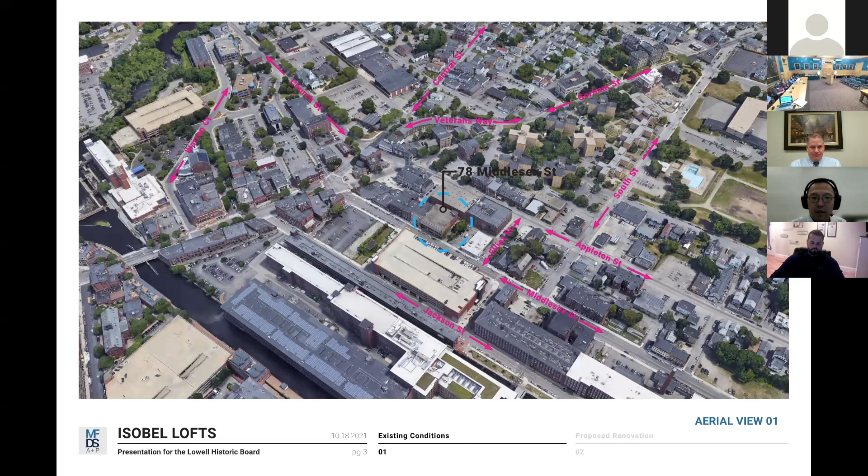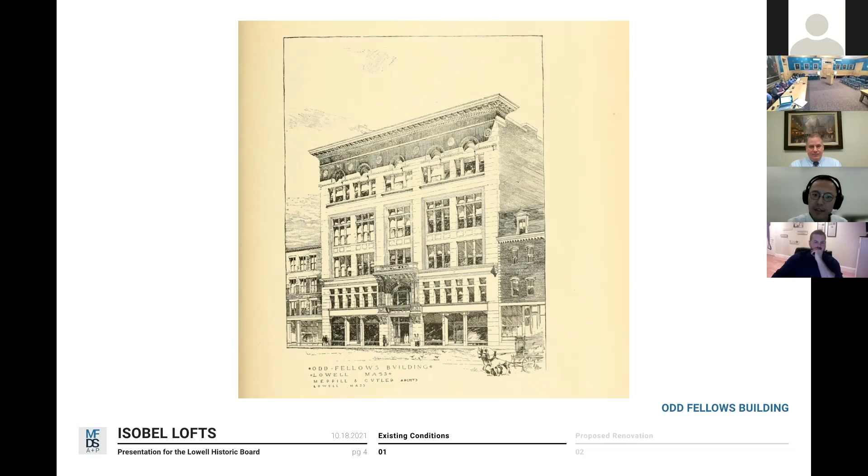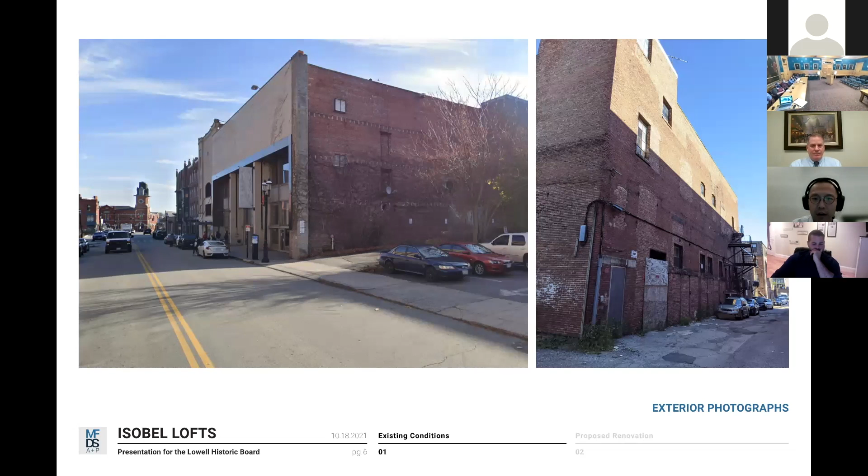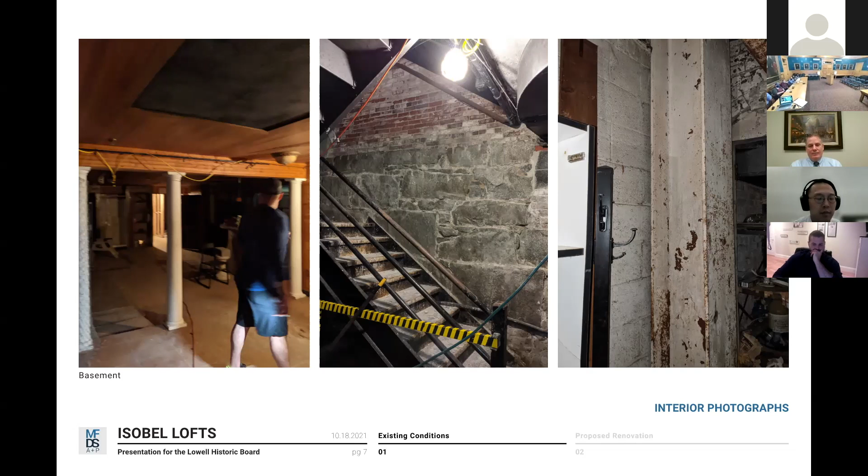You can see that there's a good mixture of existing party wall brick on the sides and the rear, as well as a new masonry exterior wall of the 3-story commercial building. The existing conditions on the inside, we believe, are the original foundations to the Oddfellows building, as well as a mixture of brick, load-bearing brick, steel, and wood infill. So it's currently just a hodgepodge of structural systems in the building.

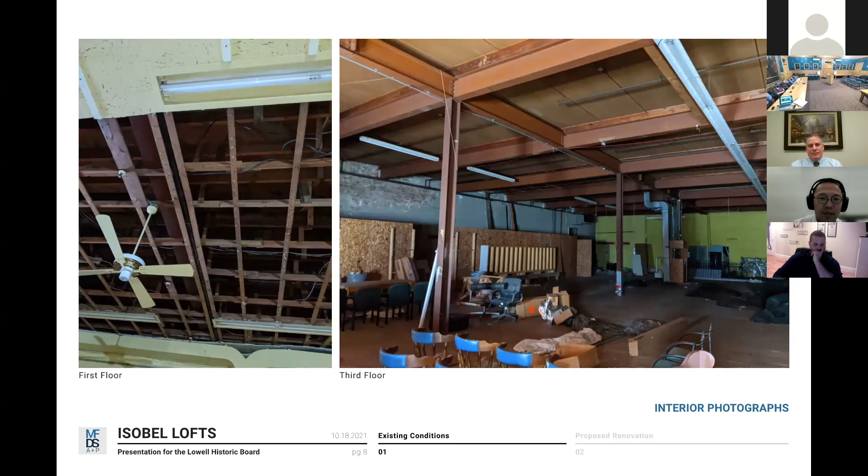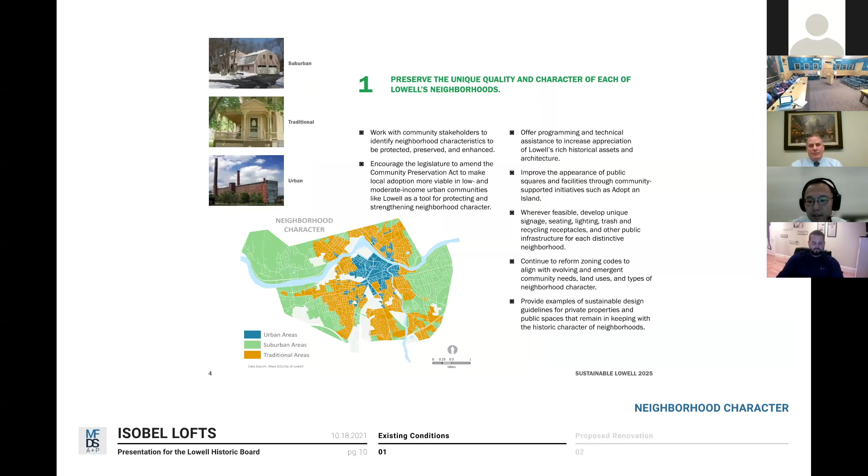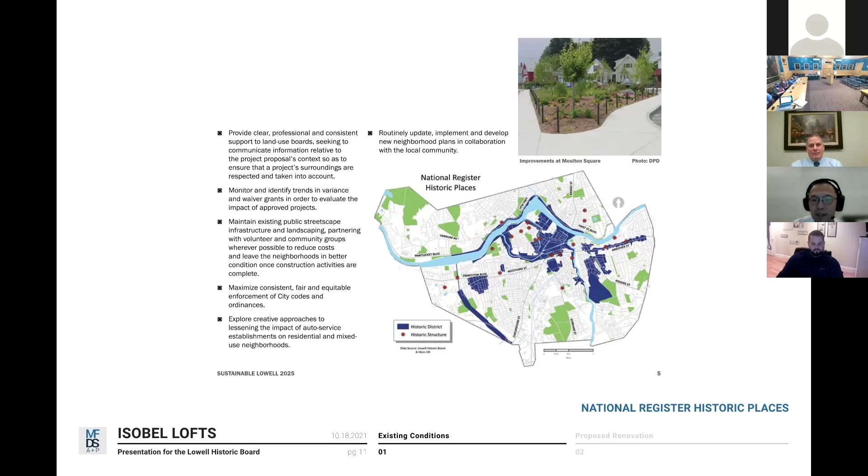Just some context—we are in the urban area in the downtown zoning area for Lowell. And as we've mentioned, this is in the historic district, but it's a non-contributing building, given that it was built in the 70s without any regard for the existing building before it.

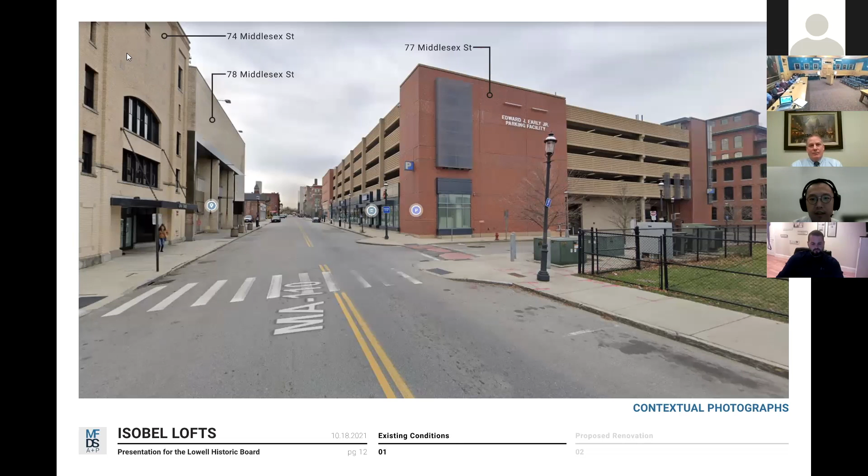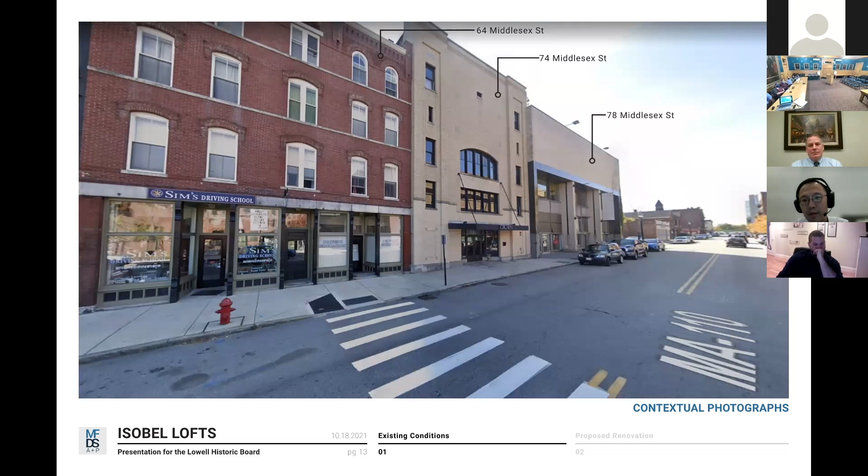Some more context: 78 Middlesex is the tan building in the background on the left, just adjacent to 74 Middlesex, and then the Early garage across the street. This stretch is a bit eclectic. You can see the start of the more historic area just 2 doors down from us, but as you go down the street, we have the vacant lot that we also own, as well as the single-story commercial building next to that.

With the proposed renovation, we are proposing to keep the existing 3-story structure and completely gut renovate and rehab the structure to a new facade.

We are proposing to landscape the current paved lot into an open, landscaped space for the tenants, with some utility areas in the back for loading, trash, and transformer areas.

We are also proposing to cut a new open air atrium into the middle of the building. The building is about 90 feet by 90 feet square, quite deep, good for a commercial space, not so great in terms of getting light into the darkest spaces for units and residents. So we've proposed to cut a rectangular hole all the way down to grade to get natural daylighting into the deepest part of the site and the existing building.

It'll provide natural daylighting for the units, as well as a small open space just as you enter the lobby from Middlesex Street, you see here. There is an existing pool that was part of the Club Fitness in the basement, and we are proposing to add a new skylight that would let daylight in from this new atrium down into the basement.

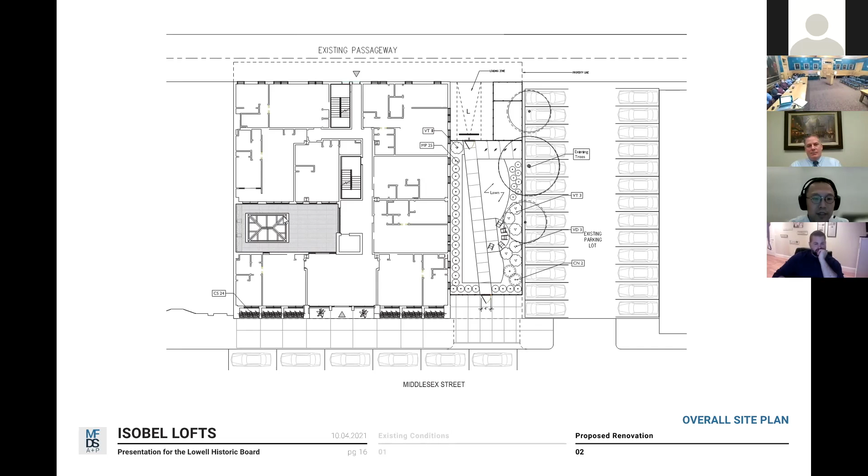This is a sketch of a proposed landscape that has a number of revisions in coordination with DPD and Steve. We originally had the fence setback 10 feet, but in discussion with Steve Stoll and DPD, the recommendation was that the fence be brought back so that it is coplanar and aligning with the front of the existing building, continuing the line of the street wall along the sidewalk of Middlesex Street.

We are proposing to fence the entirety of the landscape with an open metal picket fence. It's a private use for the residents, with a variety of low-lying hedge bushes to line the perimeter.

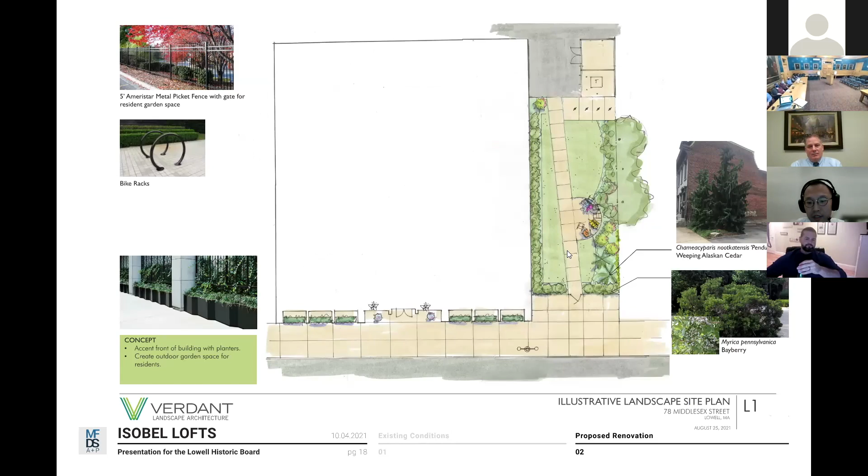We are also proposing in the revised sketch to put a tree in the bottom right corner of this image, but I believe it's the northwest corner of this landscape plan, to provide some shade at the sidewalk.

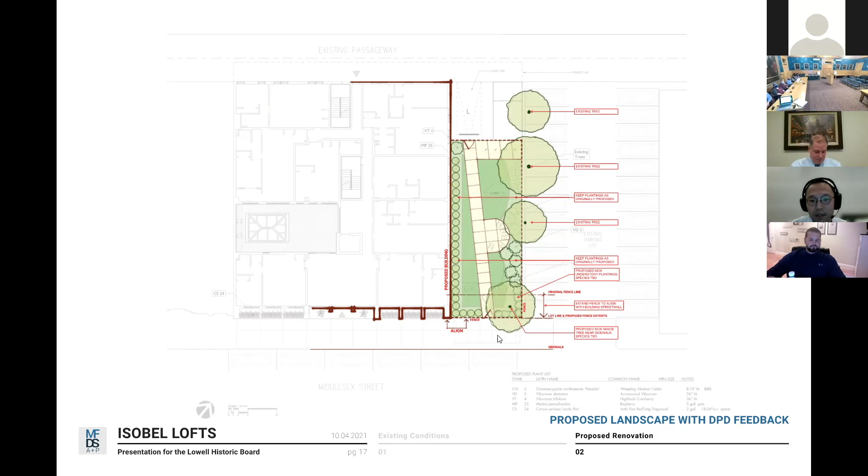To go through the plans quickly: the proposed basement, we are proposing to keep the pool and renovate the existing area to be amenity space with a bathing and lounge area surrounding the pool, a gym fitness area to the north of the page, and all the changing and showering facilities needed.

We're also proposing per-unit tenant storage down in the basement that will accommodate bikes in lieu of a dedicated bike room that not all tenants would use. We're proposing to provide each tenant with a separate space, a large locker, if you will.

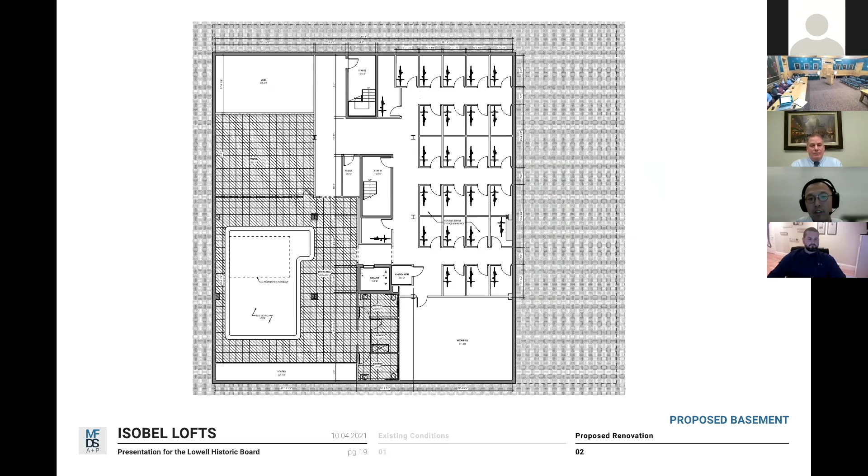Going back to the ground floor, zooming into the plan, we propose that you come into the building through the center into a large lobby that looks straight into the open space and atrium of the new courtyard. On the ground floor we have 8 units lining the perimeter, and the main elevator and stair lobby in the deepest part of the building, centrally located.

On the upper floors, it's more or less the same plan, except the lobby has now been replaced with another unit. Again, you can see the atrium providing a lot of daylight for these units in the deepest part of the building.

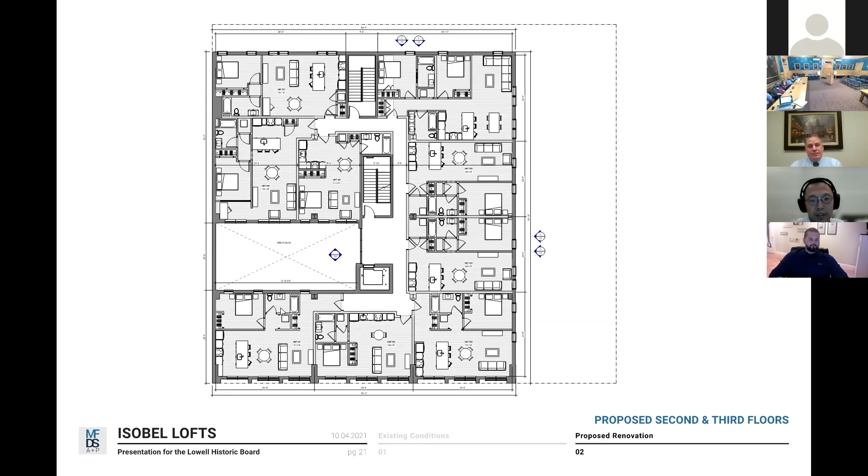On the roof, we do not have specific rooftop mechanical equipment at this point, but based on previous projects of similar size, this is the amount of rooftop mechanical equipment we suspect will be needed. We're proposing again to put it in the middle of the building.

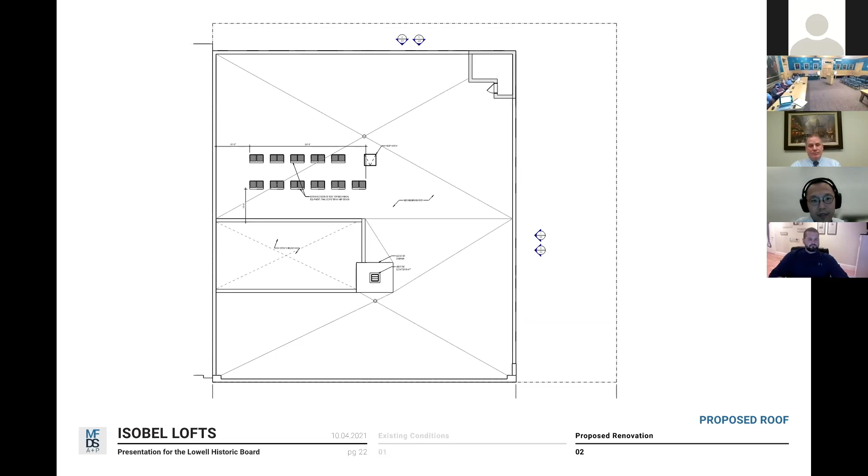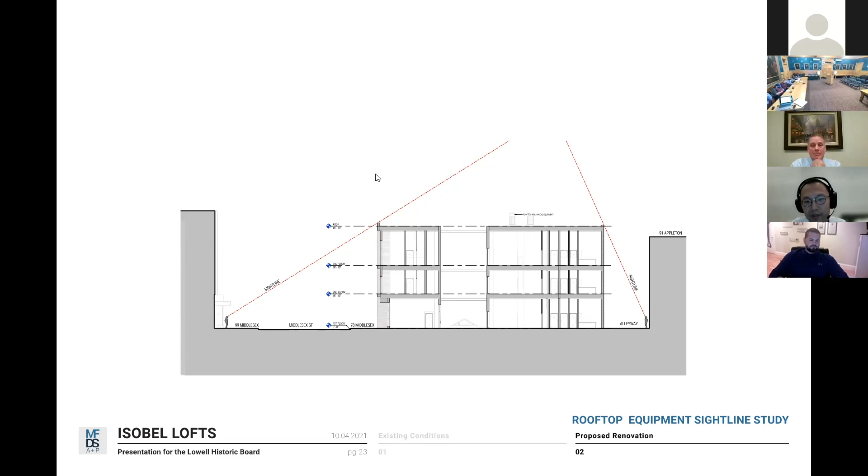On the next page, we did a sightline study. Where I'm circling with my mouse is where the two rows of outdoor condenser units are located, and to the left we have Middlesex Street. Across the street at 99 Middlesex, we have a person with a sightline view of the parapet of the proposed 78 Middlesex, as well as another person standing in the back of the alley looking up at the rear of our building. So from the street, there should be no views of the proposed rooftop mechanical equipment.

So with the existing 3-story structure, there are some strong bones, some lines within the existing structure that we must keep.

It obviously is not the Oddfellows building, and so we are not proposing to build and design a traditional historic building, but we hope that what we propose is a modern, contemporary piece of the fabric that hopefully will fit into the downtown character.

So we are proposing to completely rehab the exterior along the street wall of 78 Middlesex with a strong new brick frame that provides some rhythm and order to the building. Inset from that, we have large format cementitious panels that provide the backdrop, as well as large windows from a company called Amberline, a European thermally broken tilt turn product and system that's very efficient and quite insulating.

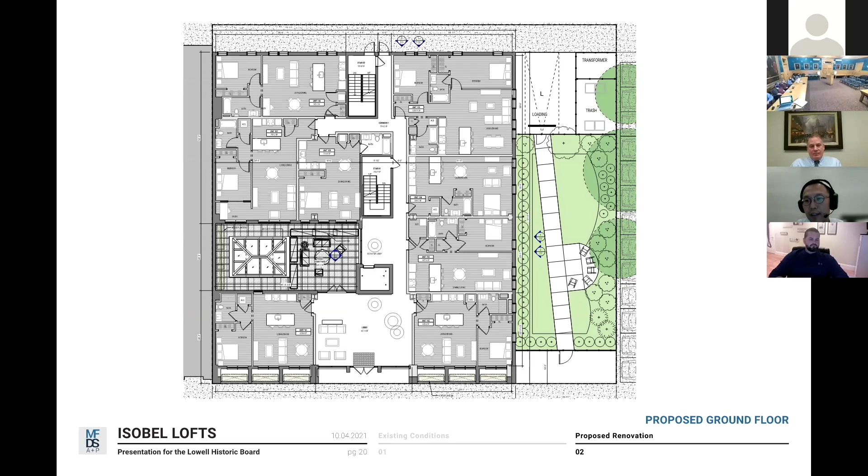On the ground floor, we've actually stepped back the first floor wall 5 feet, and we propose to put the same fencing that we have for the landscape across these deep wells along Middlesex Street. Beyond that, we have a series of fixed planters that will provide some privacy, so that these ground floor units have ample daylight and some screening from the street.

Proposed versus existing, you can see there's some strong bones of especially the outer perimeter walls, but we suspect that these pilasters here are structural as well, and so we are proposing to keep that and continue that rhythm.

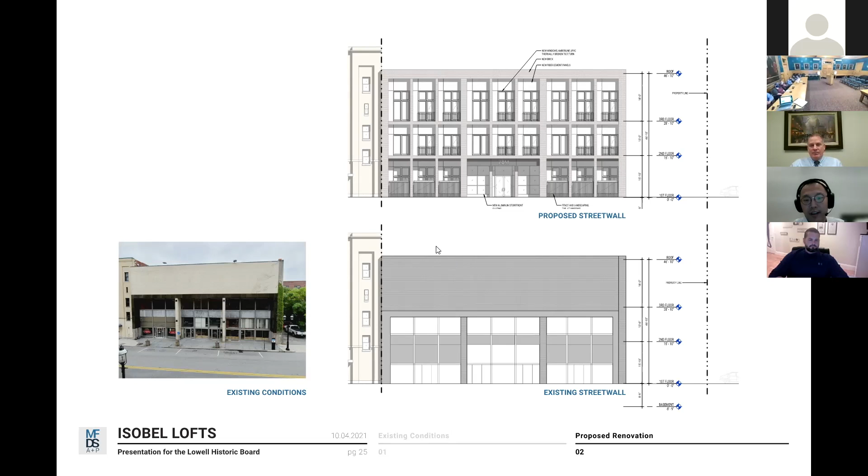This image represents the scope of what we hope to do with the size and the amount of openings for the windows for the units. But of course, once we get going with our team of consultants, with the approval of all the boards, we hope that we will do this study and get the windows right.

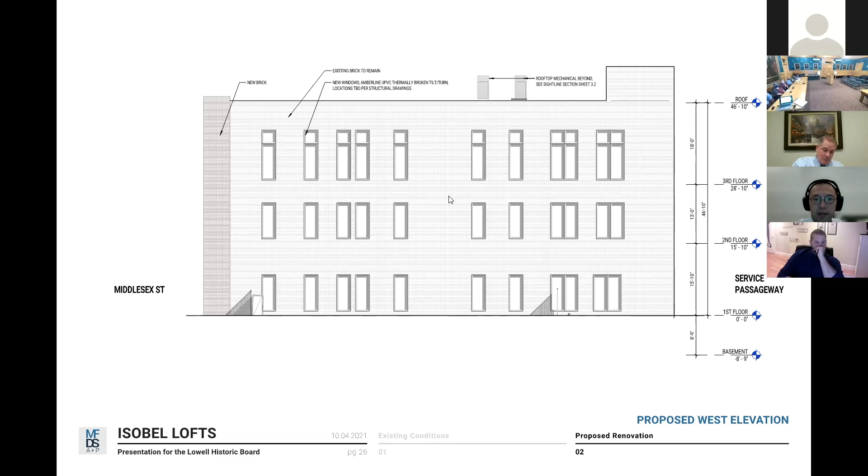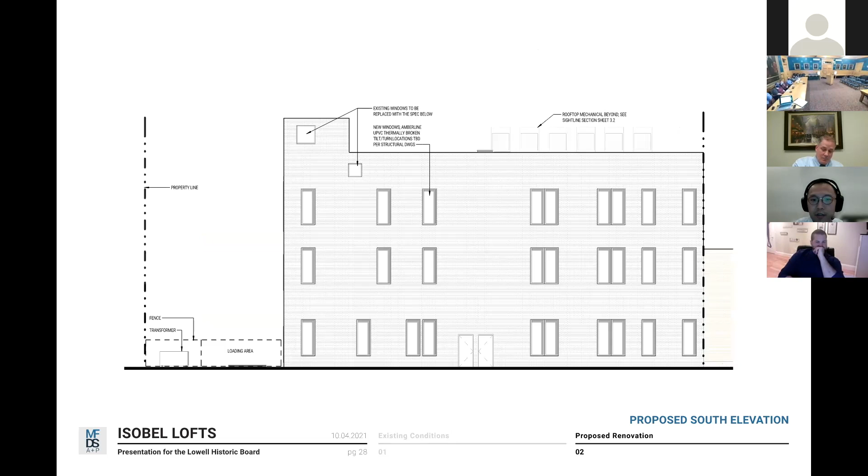We are proposing to keep this existing brick and cut new openings for these new units. Again, existing versus proposed, and you can see in this smaller image on the lower left, the existing party wall brick. In the rear, it's the same condition, existing brick that we are again cutting new openings into, and another snapshot of existing versus proposed with a photo of the alleyway.

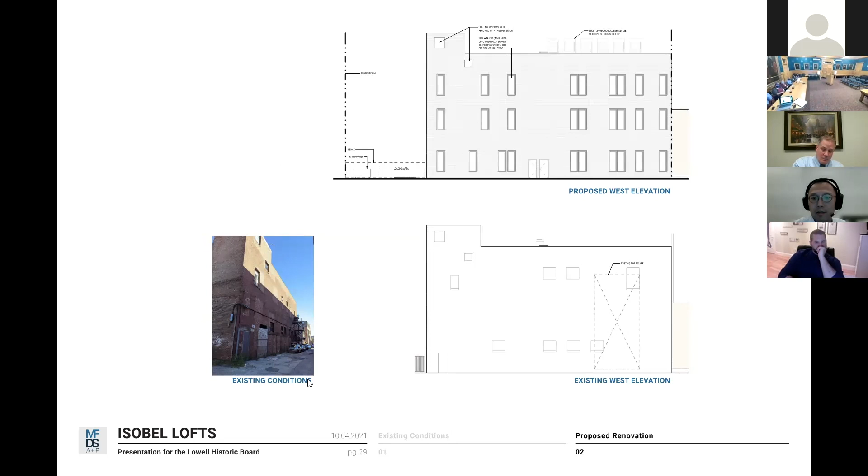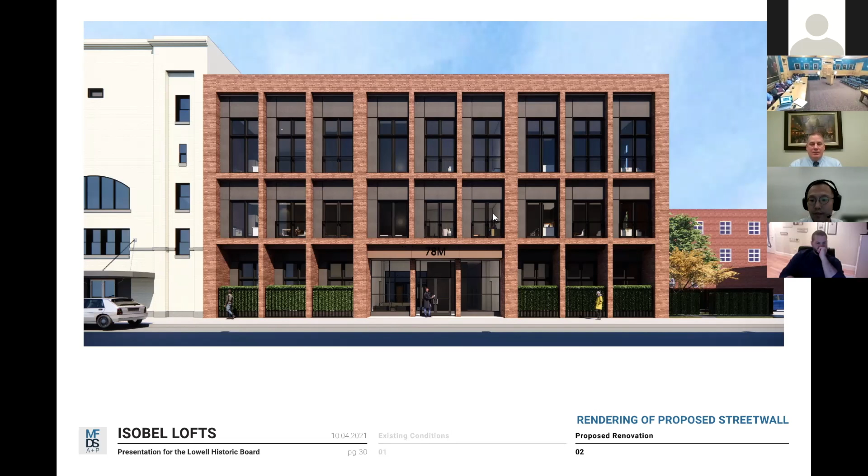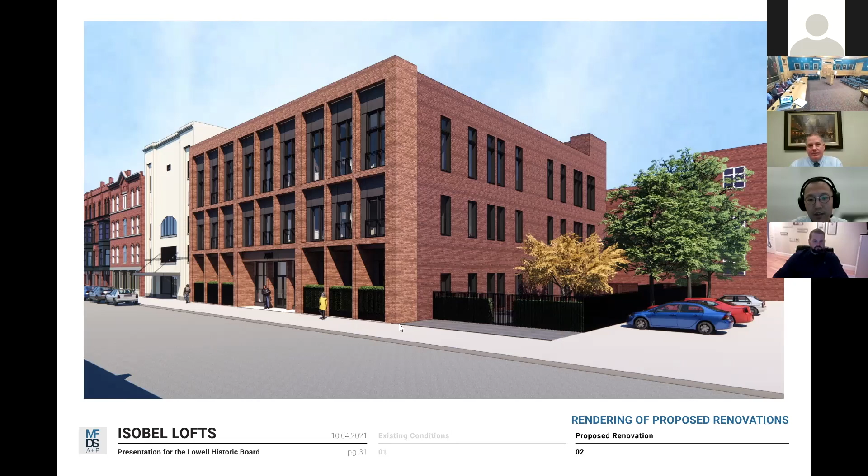Just looking at the corner of the proposed development, this image is outdated. We've since made those corrections to the landscape after we submitted this package, but this fence would be brought up right along the sidewalk, so that there's a continuous line of this picket black metal fence along the street wall. You can see the scope of new openings that we propose along the existing brick wall.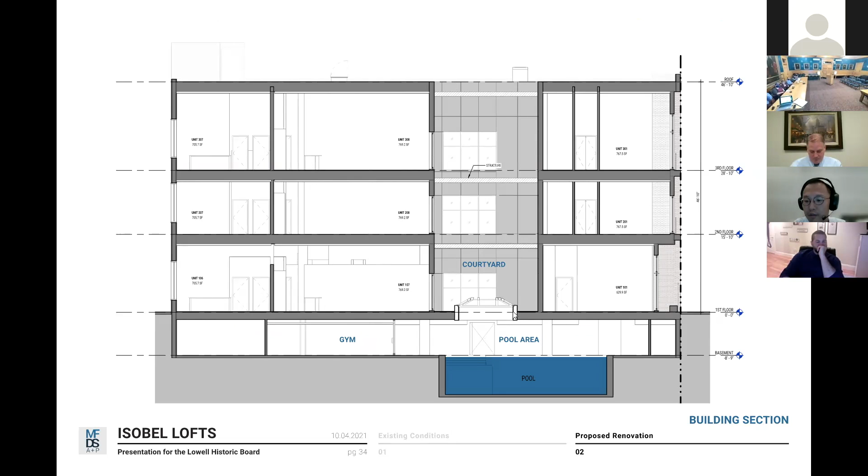And that's the end of my presentation. I will turn it back to John. Thank you, Alex. Great job.

I should also mention to the board that we have received approvals from the planning board for the site plan and issuance of the special permit. We received a variance from the zoning board of appeals for lack of off-street parking. So this historic permit is the last phase of the permitting process. We feel we meet the criteria. We've reviewed the proposed conditions that Steve has prepared, and we are agreeable to those conditions and request approval of the historic permit tonight. But we're happy to answer any questions of the board members.

Okay, thank you very much for your presentation. At this point, I'll open the floor to anyone who wishes to speak in favor of this application.

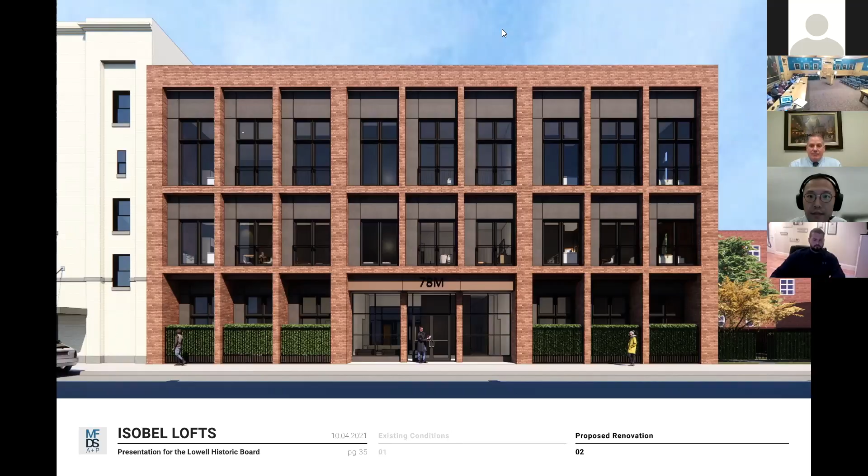Steve, do we have anyone on Zoom? Alex, can I get the screen back? Yes. Thank you, I don't see anyone here. Okay.

Anyone who wishes to speak in opposition to this proposal? Hearing none, I'll open it up for board questions.

I have a question for Alex. You mentioned a picture of some of the original foundation. Was that from the former building, the historic building? I believe so. We have no documentation saying that it's existing, but given that this existing three-story structure was built in the 1970s, it's doubtful they would have used a new granite foundation. So it's likely that the granite foundation is the original foundation for the Oddfellows building. Thank you.

I have a question about the 5-foot setbacks on the front. Will those be accessible to the unit owners? Can you go out, would that be outdoor space? Yes, I think the way we've planned it, one of those bays is a door. There isn't much space given the setback is 5 feet, and we're proposing 2 feet of a planted raised planter to provide hedge screening, so they'll have approximately 3 feet of outdoor space. It's more to provide light and privacy, and they could open the doors so it could expand the space, but it's not meant to be an occupiable space. It really kind of expands the interior space out.

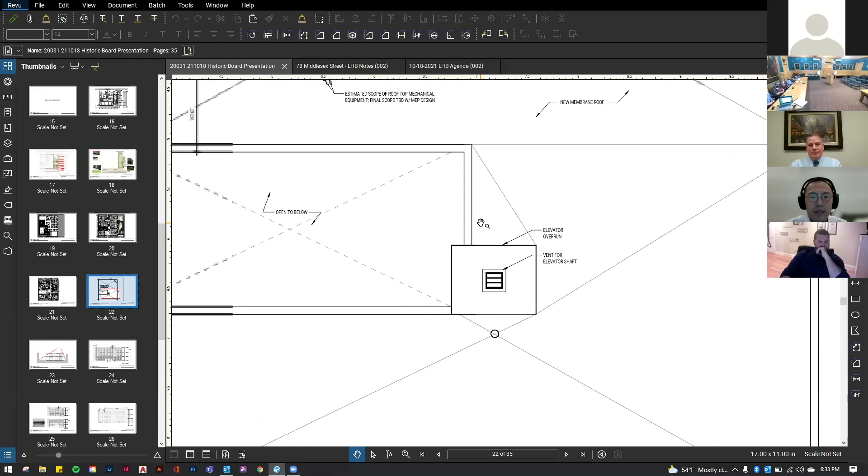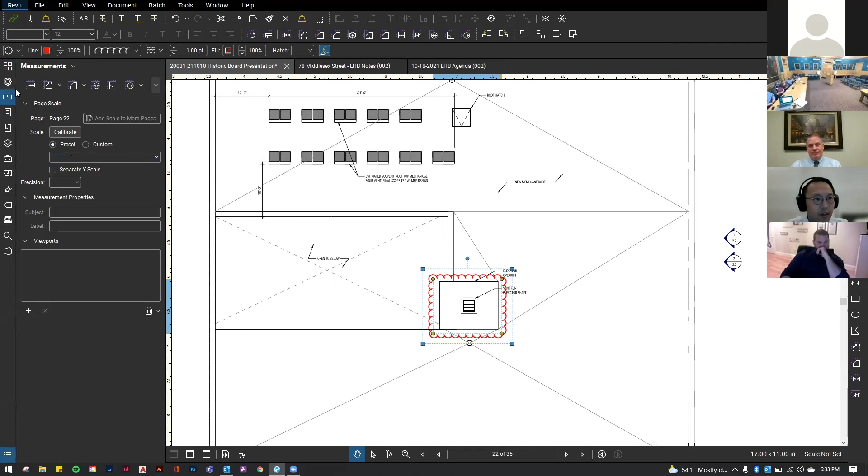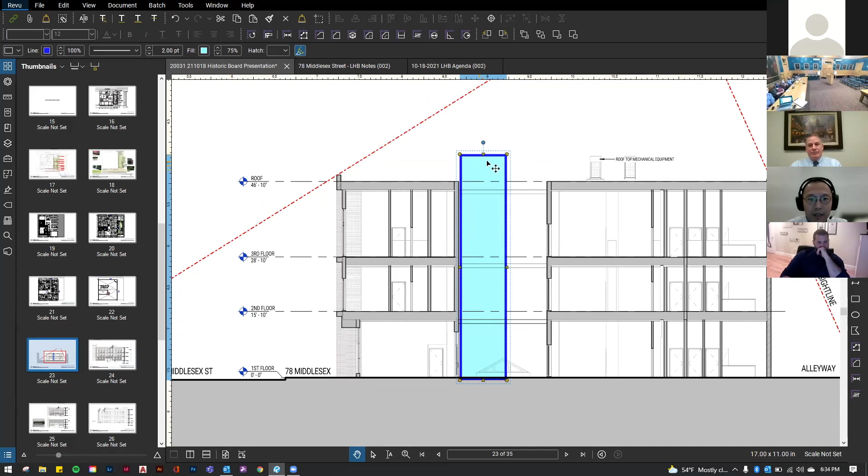Sorry, let me share my screen here. Okay, can you see my screen? Yeah, this is the elevator. In plan, it's centered in the building, about a third of the way in from the street. That's the elevator overrun. Given that this floor plate is so tall, I suspect any overrun is going to be 1 or 2 feet above. I believe the bottom of the elevator is aligned with the courtyard wall, so if we were to cut a new section, the elevator would be somewhere there. Even if this is say 5 feet tall, I don't believe it will be visible from the street either.

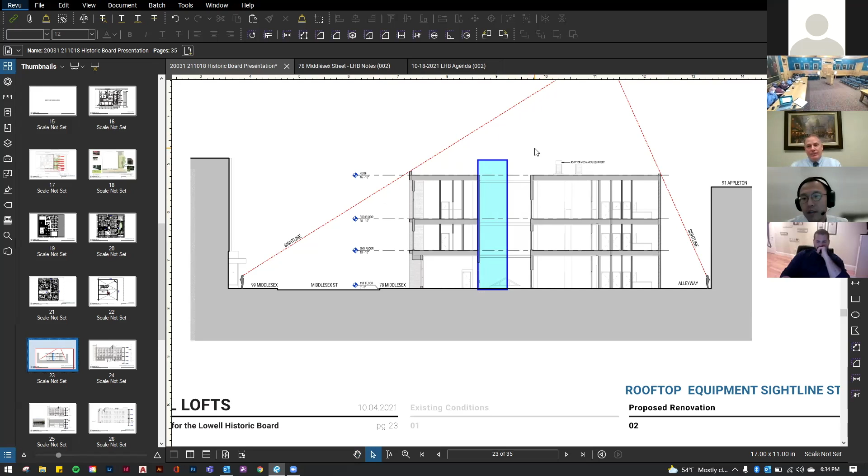Will the elevator abut the outdoor space? Will that also be a common patio on the roof? I'm sorry, could you repeat the question? Is there going to be outdoor space on the roof? No, the roof is only for mechanical equipment. Okay, then my question's not relevant. Great, thanks. You're welcome.

Any other questions from the board? Yeah, I just have a question regarding parking. I was looking at the layout and I wasn't seeing accessible parking spaces. I'm not sure if you have plans for that. There's no parking associated with the redevelopment of this property whatsoever. We received a variance from the Zoning Board of Appeals for relief from the requirement of off-street parking. Except for landscaped open space on the west side of the property, the building takes up most of the lot. We felt that open space on the west side is much better used as open space for the tenants than it would be for the minimal parking we would have gotten from it. Thank you.

Anyone else have comments?

I think overall this is a very successful adaptation of the existing structure. I think you've chosen materials and a facade pattern that really fits in well with the streetscape, but is also clearly contemporary. So I think this will be a really valuable addition to the district. And I appreciate the care you've taken with the design to have it fit within our standards. Thank you.

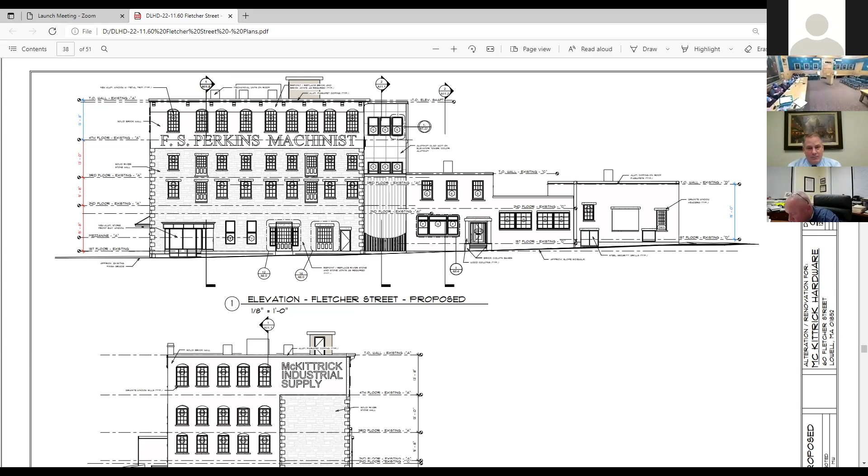Okay, and in the space between the main building and the two-story building, I did see there was a remnant of a panel sign that had fallen onto the ground in that little alley area, but I thought that was the bottom facade facing south. Here, and then there's this other one. It seems to me that the south facade is a painted one that you can see as you approach from Thorndike Street, just there.

No, yeah, that one I think was a metal panel sign, but the only other one opposite was the tall one, I think. That one, yeah, that one, I thought was painted, but is that the one you have? I don't know, yeah, it looked painted to me. I thought it was painted, but I could be wrong. We'll have to double check that.

But do we know the age of that painted sign on the south facade? Just wondering whether that's technically been determined a character defining feature or not. 1950s, 60s. In fact, it was repainted and reinstalled in the last iteration several years ago, so it's not that old of a sign.

Are there windows proposed where that painted sign is located on the fourth floor as part of the rehabilitation of the building, or is that going to remain a blank wall? It's gonna be, we made a blank wall there. I think there may be some discussion about some signage later on for a tenant, but that would all have to be reviewed with Steve.

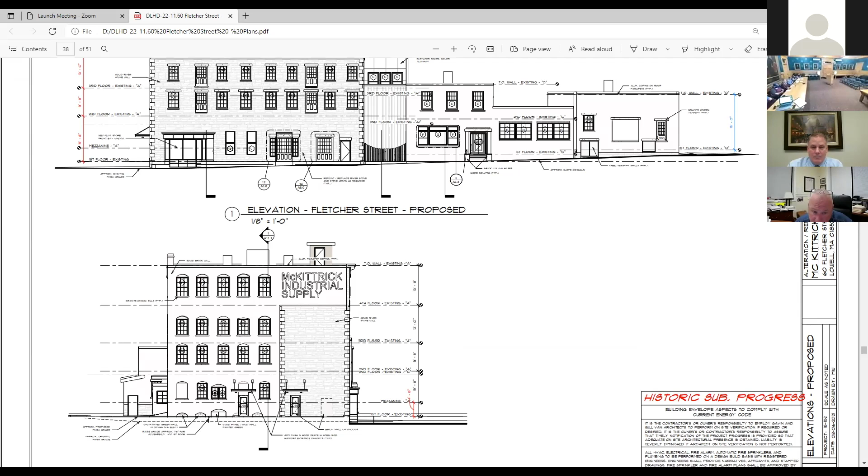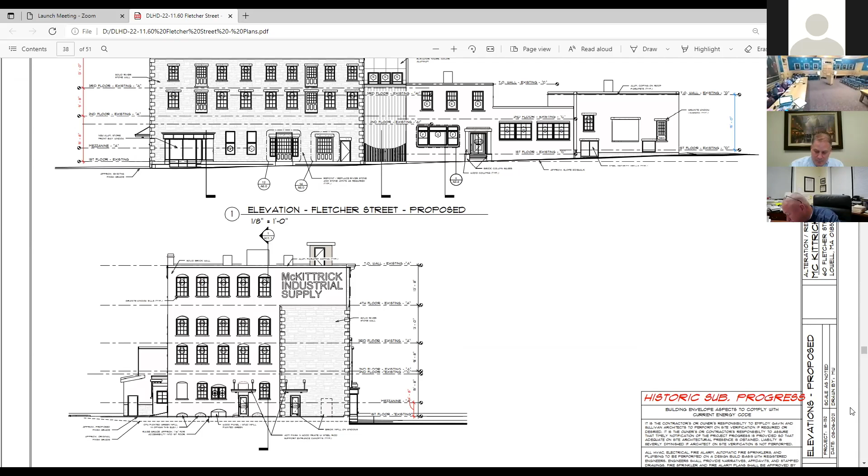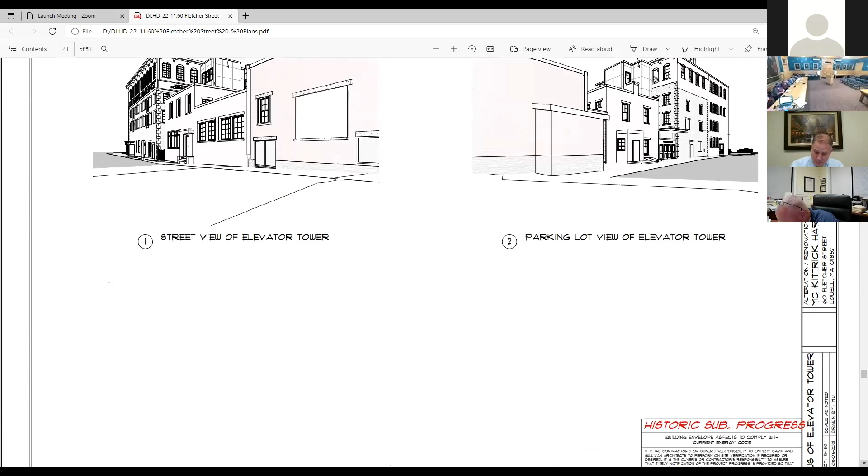Something to note to the architect, in review with our historic architect, as far as accessibility: on page A9.2, there's a door in question, D10, and it has to do with clearance to the ramp for egress. A9.2, door D10.

What was the question on it? It wasn't a question, just something to note, passing over with my historic architect. He noted door D10 and had a question about the egress, to be sure there was enough space there to be accessible. So just make a note to the architect about D10 on the interior, first floor, this area right here, I guess, David. I'll check that with Mark.

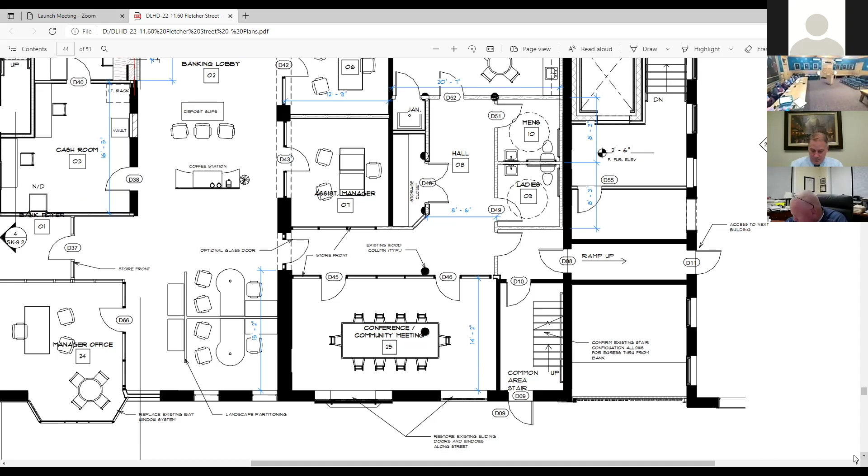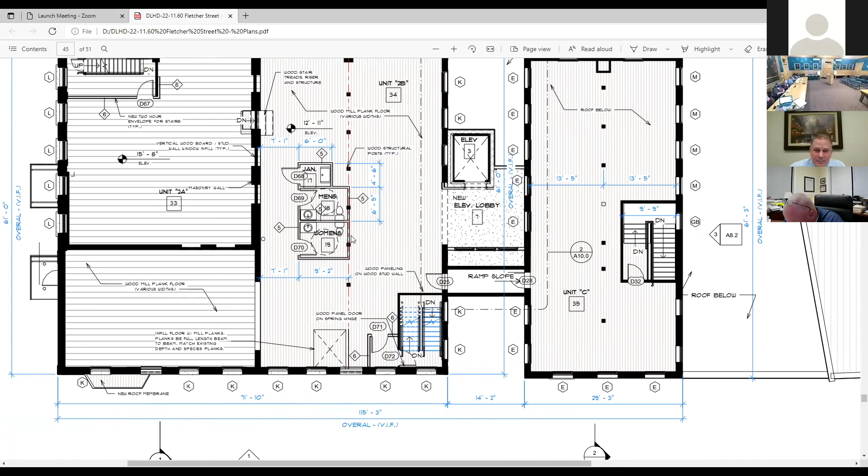Okay, and also door D69 on A9.3, David wrote down an 18-inch minimum there, just to check for that, and also the railings, if there's railing extensions, on the drawing at the bottom. And that was it to note. Thank you.

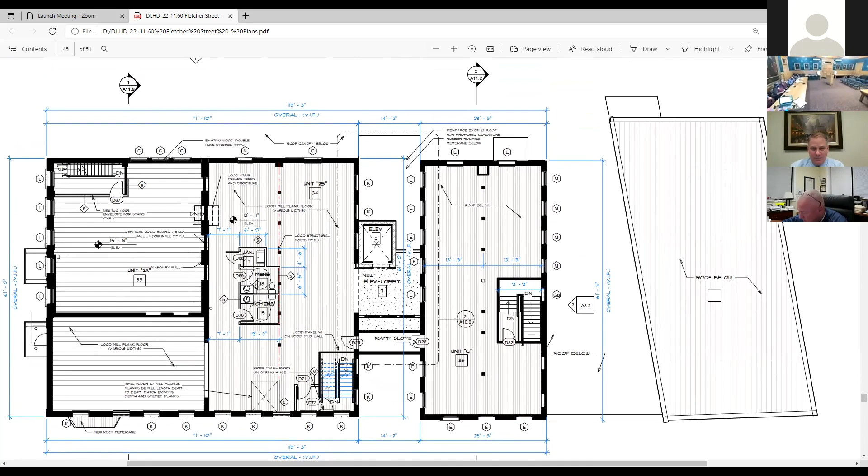Steve, could you pull up the floor plan for either the third or fourth floor? There's both of them there. How's that? That's helpful, yeah.

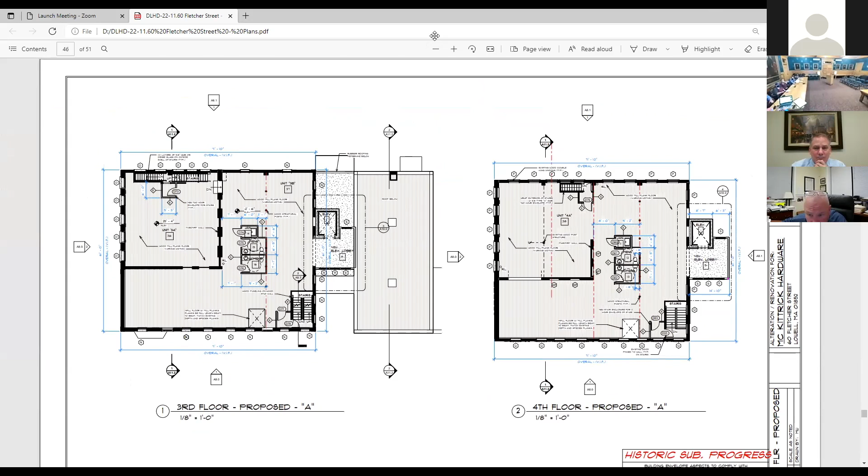I had one question about the elevator tower. Obviously on the first and second floors it's within the existing building structure, so it's really not visible. But the third and fourth levels of that tower are certainly visible from one side of the building. I just had a question whether there might be a way to make the footprint of that tower smaller to reduce its mass as viewed from the exterior. I see there's the elevator itself, but then there's a large lobby in front of it with windows that kind of brings attention to this new contemporary element. I'm wondering whether there might be options for reducing the size of the lobby area to reduce the massing on the exterior on the third and fourth floors.

I'll bring that up to him. We'd just as soon not do it if we didn't need to, so I'd run that by Mark, if we don't need it to enclose that area there. I'll check, wasn't sure if there's a code requirement for the size of a lobby at an elevator or not, but anything you could do there to reduce that mass would certainly help to minimize the visual impact of it.

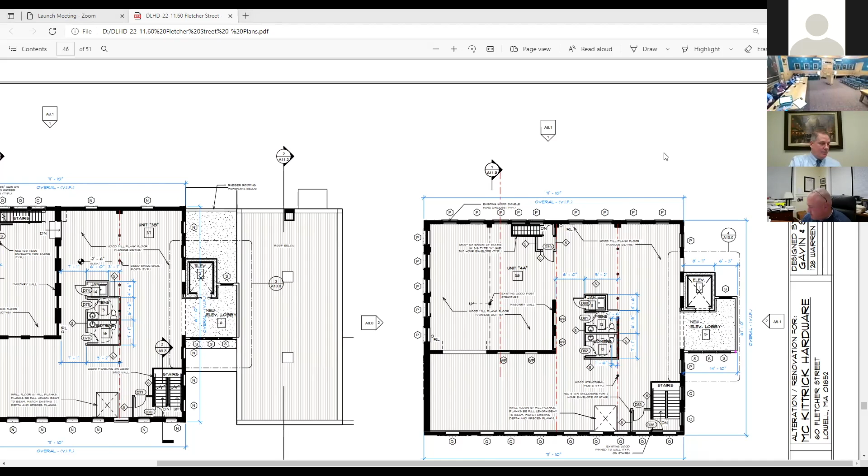I will make a motion to approve this project with the recommended conditions listed in the memo. A second. All in favor? Aye. Chair votes aye.

Great, thank you very much for your presentation. Good luck with the project. Thank you. Thank you all for your time. Thank you.

All right, well, that concludes the public hearing portion of our agenda. We will now move on to other business. The first item under other business is enforcement violations update.

Steve, do you have anything you want to bring to our attention under that? Really what's there is the process that we've been thinking of streamlining a bit more. So you have submitted tonight the existing and the proposed that Jeffrey took a look at, and also George in his capacity as the chamber rep, and now it's basically everyone else's opportunity to take a crack at it and see if there's anything else they might want to look at. It would be nice to get this in place, because you don't want to send letters under one process and then have it juxtaposed with a new process, as there are different realms, so to speak. So it's there for review and comment and hopefully adoption.